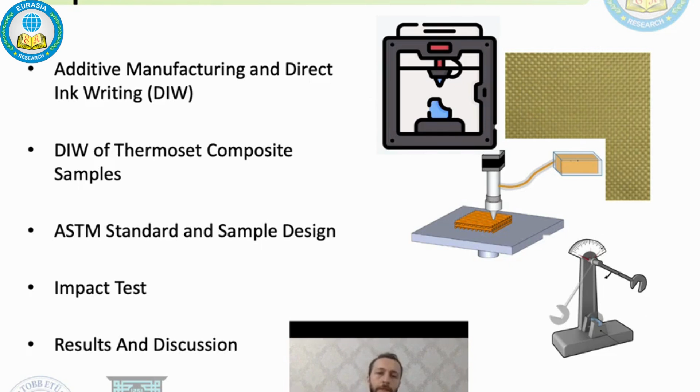Additive manufacturing, also known as 3D printing, is a fast-growing manufacturing technology. As you all know, additive manufacturing allows us to fabricate complex geometries cost-efficiently and rapidly via layer-by-layer deposition. But beside all these good features, AM also offers low mechanical and thermal properties, as the basic process begins with the use of thermoplastic materials like ABS and PLA, which are very easy to use and cheap.

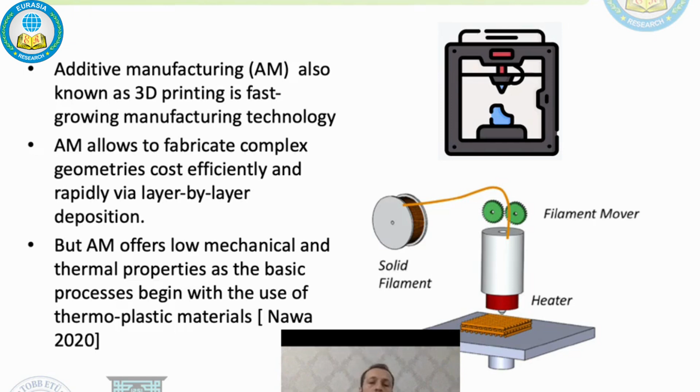But thermoplastic printing is based on repeated melting and cooling process, and it causes slow bonding between layers and lines. Because of this, mechanical properties of printed samples are generally lower than feedstock materials' mechanical properties. To overcome the mechanical and thermal drawbacks of the thermoplastics, thermoset polymers can be used. Thermoset polymers can be used in additive manufacturing via direct ink writing.

Direct ink writing is a new method based on extruding an ink whose viscosity is adjusted to be self-supporting during and after printing. As you can see on the right side, there is an extruding nozzle. With the nozzle, we can deposit our feedstock materials, we call it ink. And as you can see below, extruded material retains its shape during and after printing.

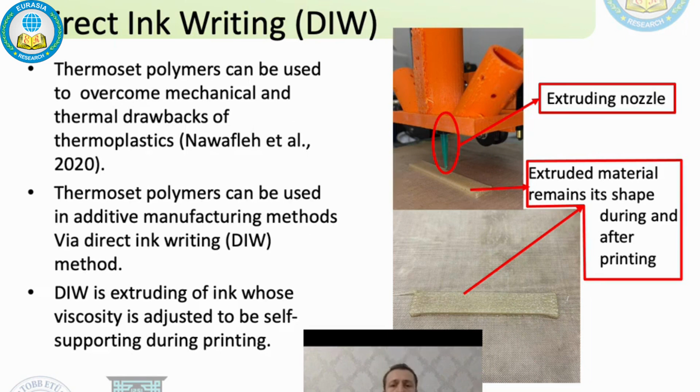Ink for thermoset polymer composites. Thermoset polymer composites can be fabricated with direct ink writing, but the first stage of printing thermoset polymer composite is to prepare a printable ink. A printable ink includes epoxy resin as a thermoset polymer matrix and nanoclay as a rheology modifier. Rheology modifier has a crucial role in preparing ink because ink viscosity has a crucial role in direct ink writing. To get a printable ink, ink viscosity must be adjusted carefully via rheology modifiers.

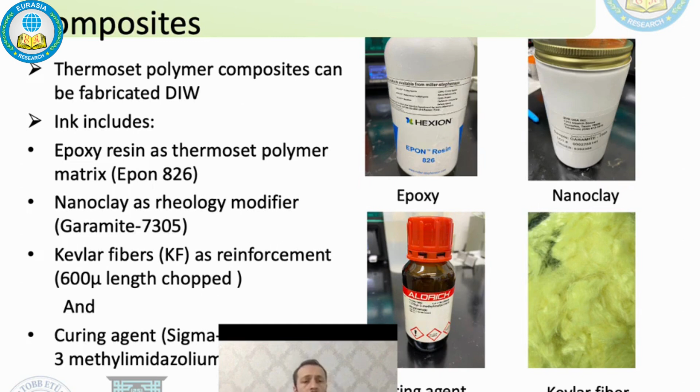And as a reinforcement, we use Kevlar fibers. And lastly, curing agent to complete the thermal curing process. This is the stage for ink preparation. First, we add curing agent to epoxy and mix it. In this stage, we call that ink pure epoxy. Pure epoxy ink has no rheology modifiers like nanoclay or no reinforcements like Kevlar fibers.

Then we add nanoclay to that ink and mix it. In this stage, we call that ink base ink. Base ink has nanoclay rheology modifier but no fibers. After that, we add Kevlar fibers to that ink and mix that, and we get the final ink version, Kevlar fiber reinforced ink.

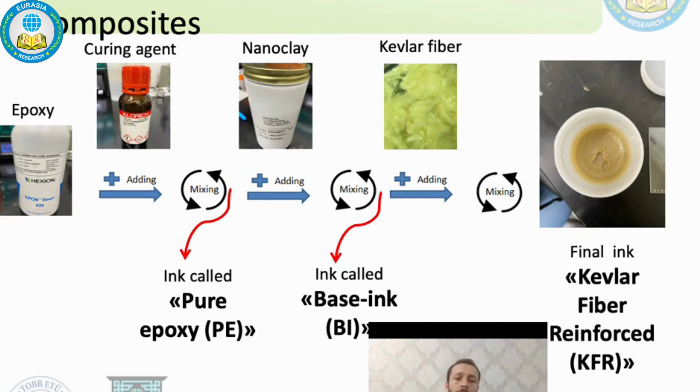To directly write that composite ink, first of all, we fill that ink into the air adjusted syringe, and after that, we adjust the air pressure and measure the ink extruded in 10 seconds to find ink velocity. After that, we calculate all the printing parameters. Then sample designs are done according to ASTM standards and G codes are generated. After that, 3D printing can be started.

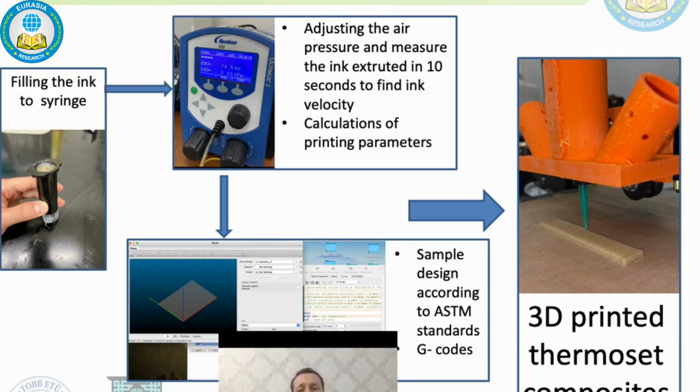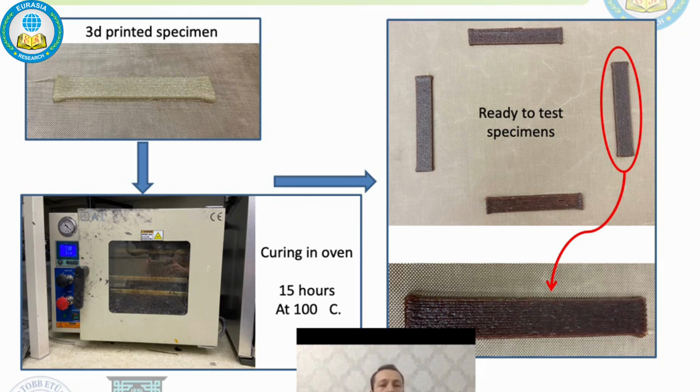After all the samples are printed, all the samples are cured in oven. As I mentioned before, there is a repeated melting and cooling process in thermoplastic printing methods like fused filament fabrication, etc. But in direct ink writing, there is just one heating process after printing, called curing. This curing process at the very end offers stronger bonding between printing lines and layers.

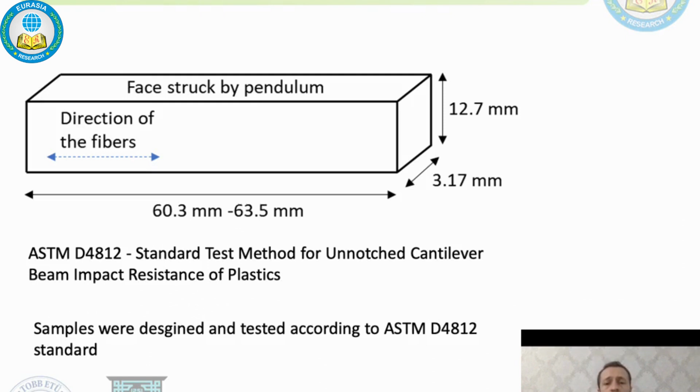Sample design and test setup. Samples were designed and tested according to ASTM D4812 standard, which is the standard test method for unnotched cantilever beam impact resistance of plastics. In the standard, dimensions of the samples and orientation of the fibers are very important. These issues were given importance during sample design, and this is our test setup for impact test. Test specimens were placed and fixed between jaws as shown at the bottom of the figure.

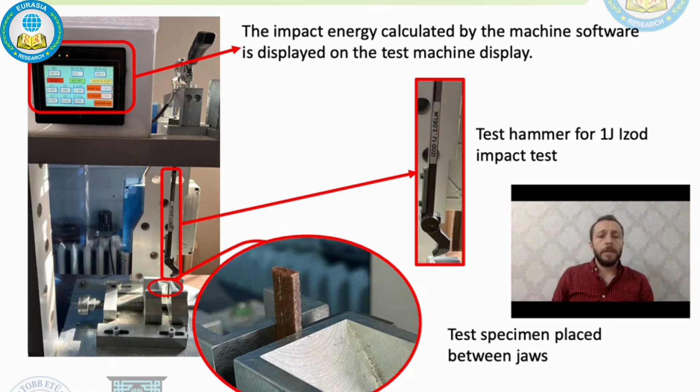Tests were carried out with a 1 joule Izod impact test hammer, and the impact energy calculated by the machine software was seen and recorded on the test machine display in the left corner.

Test samples. To examine the effect of fiber amount and nanoclay amount on impact performance of 3D printed composites, three main test groups with different nanoclay and Kevlar fiber amounts were printed. The first group is pure epoxy. The pure epoxy group contains no nanoclay or fiber. Since there is no rheology modifier, that ink is impossible to print, so all the pure epoxy samples were fabricated via molding.

The 5% base ink group contains 5% by volume nanoclay but no fiber. In a similar way, the 8% base ink group contains 8% nanoclay but no fiber. The 3.5% Kevlar fiber reinforced group contains 5% by volume nanoclay and 3.5% by volume Kevlar fiber.

To prepare a printable ink, enough rheology modifier must be used both to adjust the ink viscosity and to get the ink mixed homogeneously. So we prepared all the fiber reinforced inks with 5% nanoclay to make a good comparison between the base ink group and the Kevlar fiber groups. In a similar way, the 6.3% Kevlar fiber group contains 5% nanoclay and 6.3% Kevlar fiber.

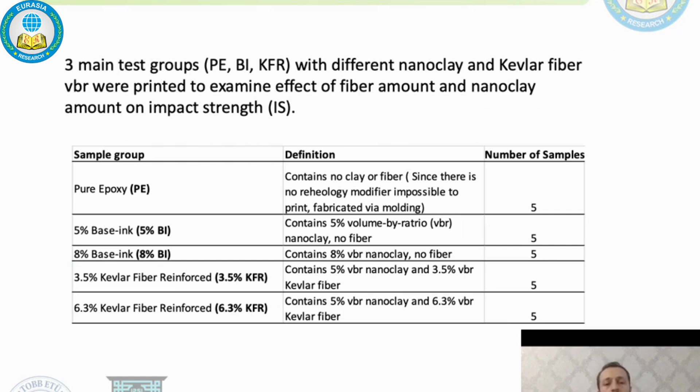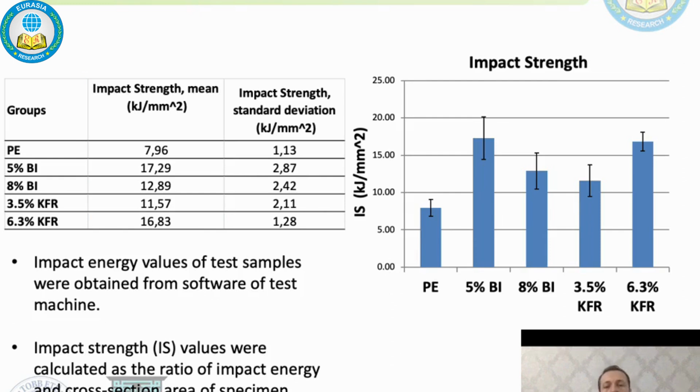Test results. Impact energy values of the test samples were obtained from the test machine software. Then impact strength values were calculated as the ratio of impact energy and cross-section area of the specimen. The mean and standard deviation values are calculated and can be seen as a table on the left side and as a graph on the right side. To compare differences between groups, Mann-Whitney U-tests were conducted and p-values of each comparison were obtained. A p-value below 0.05 was considered significantly different.

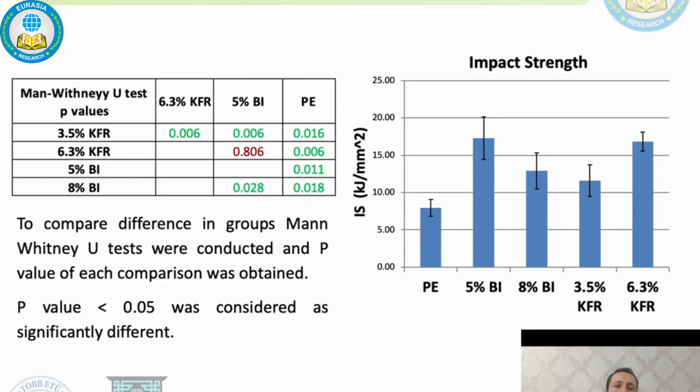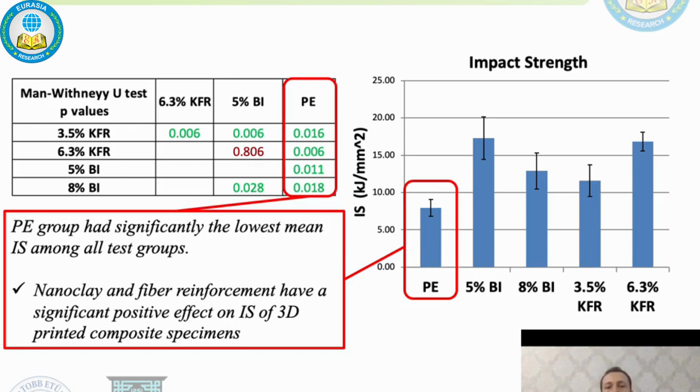Test results and discussion. As you can see, the pure epoxy group had significantly the lowest mean impact strength among all the test groups, and we can say that nanoclay and fiber reinforcement have a significant positive effect on impact strength of 3D printed composite specimens. The 5% base ink group has the highest average impact strength, but there is no significant difference between the 6.3% Kevlar fiber group and the 5% base ink group.

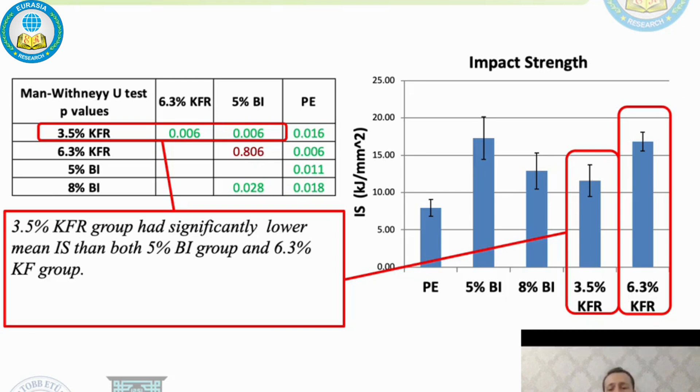The 8% base ink group had a lower mean impact strength than the 5% base ink group. The 3.5% Kevlar fiber group had significantly lower mean impact strength than both the 5% base ink group and the 6.3% Kevlar fiber group. When all results are examined, the following conclusions can be reached.

First of all, nanoclay and fiber reinforcements have a significant positive effect on impact strength, but there are some exceptions. The first one is about nanoclay. Increasing the nanoclay from 5% to 8% decreased the impact strength, which was associated with embrittlement, because increasing nanoclay amount made specimens more brittle and decreased our impact strength.

The other important result is about Kevlar fiber loading. The 3.5% Kevlar fiber group had a lower impact strength than the 5% base ink group. Since the 3.5% Kevlar ink was prepared by reinforcing the 5% base ink with Kevlar fibers, the expected situation was that the Kevlar containing group would have higher values than the 5% base ink group, but it didn't happen as expected. It's thought that this is caused by unwanted pores formed by fiber loading into the ink mixture.

But when the Kevlar fiber amount increased to 6.3%, impact strength increased again to the level of the 5% base ink group, which means that increasing Kevlar amount to a desired level eliminates the strength loss caused by unwanted pores and has a positive effect on impact strength.